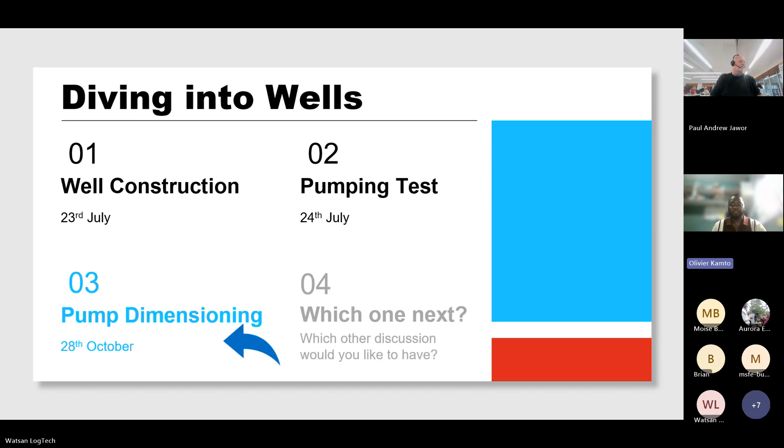Next screen Maite, I think you're in the second screen with well construction, pump testing, pump dimensioning, correct? Pump dimensioning, yes, session 3. So we are not going to make you experts of pump dimensioning, but the idea would be to push us to understand the basic considerations and basic aspects that need to be taken into consideration when doing pump dimensioning. I am Olivier Kamto, I'm one of the MSTs for OCBA, and it's my pleasure trying to guide you through this webinar.

Table of contents, Maite, go ahead. So the idea here would be to talk about why we do pump sizing and what is pump sizing. Is it just an arbitrary thing we pick anyhow, or what are the key concepts we need to accurately size a pump? How do we actually do pump sizing? And we are going to show you some manufacturer tools that will help with the exercise of pump sizing, because as we'll see slightly ahead, manual pump sizing can sometimes be trickier than it seems.

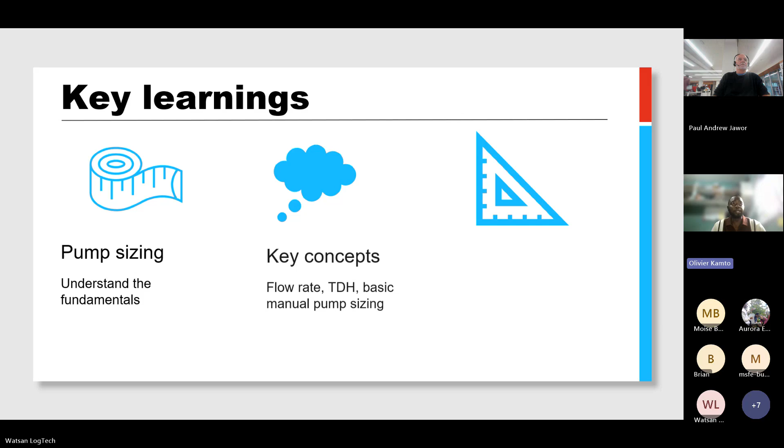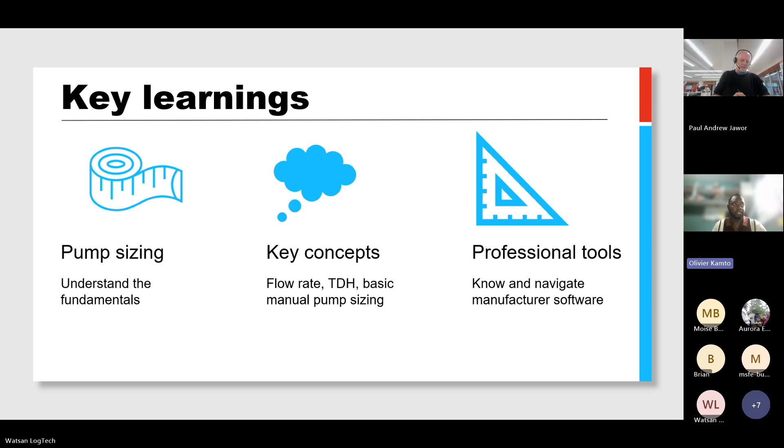So the key learnings we are hoping to bring to you, as I've already mentioned, is to understand the basic principles we need to consider, understand the fundamentals of pump sizing, and then get a feel of the key concepts needed for pump sizing, which are the flow rate, the total dynamic head, and a little bit of how manual pump sizing can be done. But in the end, be able to navigate a couple of manufacturer softwares that exist and which we in OCBA are kind of using now for our activities. Next slide please.

So the first question, what is pump sizing? I'm still not seeing how the screen is, but this was intended to be a question which I'm asking. Can you see the information we have on the screen, Paul? We have what is pump dimensioning, and we have the picture of the pump.

Great. So can anyone tell us what he or she thinks could be pump sizing? You can just pick out, you may want to write in the chat. It could be one word, whatever comes into your mind when we talk of pump sizing. Anyone?

Go ahead, Brian. I think pump sizing is determining the type of pump that will fit in a well or in a borehole, depending on the quantity of water we have, which will also depend on the distance of the tank.

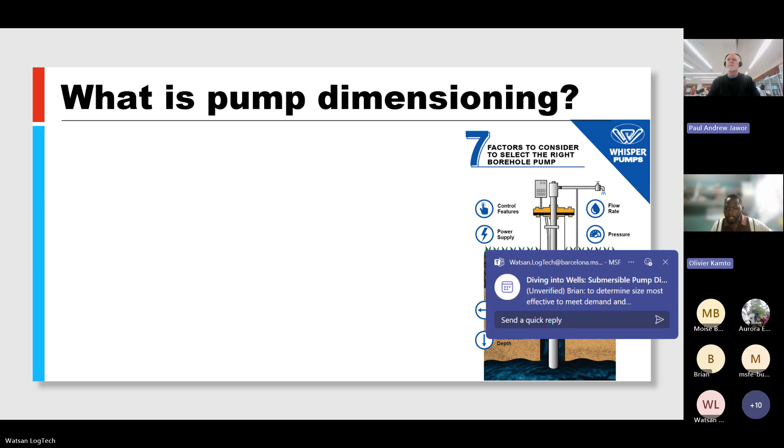Then you've head, got another one. That is great. Power requirement, that is great. The head also, we can link it somehow to the distance to the tank. We would see a little bit how. Brian also commented: to determine size most effective to meet demand and performance of the borehole.

So thank you very much, Brian. I like the idea of effective. I like the word effective, because we are looking for something that should be actually, as the word says, effective, in several aspects - cost can be one, performance can be one, etc.

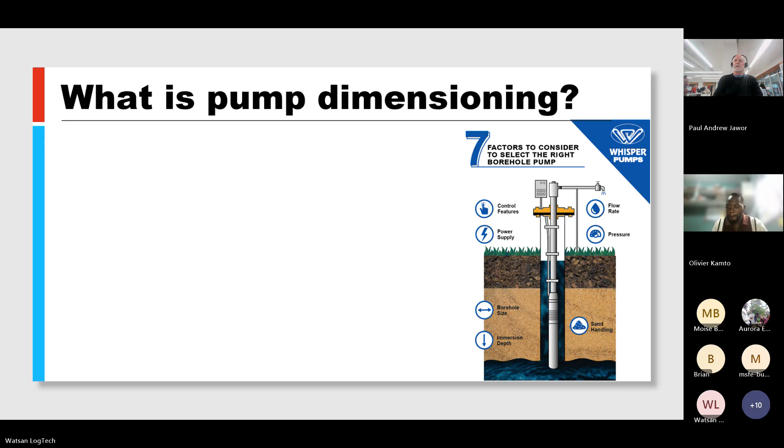So Maite, you may click. Going from all of this information, pump sizing is actually choosing the correct pump that will match the system requirements. The system requirements we are talking about here are the flow and the head of the system, but it should also be able to match the aquifer properties, because we may have system requirements that we need, but it may not match with the aquifer properties.

So it could be okay for our system, but because we are extracting too much, perhaps the aquifer can have a problem, and then in the long run we don't have the water that we need to satisfy our system needs. What is the reason for pump sizing? Why do we do this? Mainly because of efficiency, or to ensure efficiency, to ensure cost recovery, and to ensure reliability.

We should not go and buy a very huge pump that will not serve our purpose, meanwhile we needed just a smaller pump that could have been a little bit more cost effective. Or we should buy pumps that are most efficient based on our system needs.

So there is a risk with pump sizing, and the risk that we often encounter is that we can either undersize our pumps or we can oversize our pumps. Oversizing our pumps will entail high cost to purchase high flow pumps for smaller system demands, which is, we would agree, not very good.

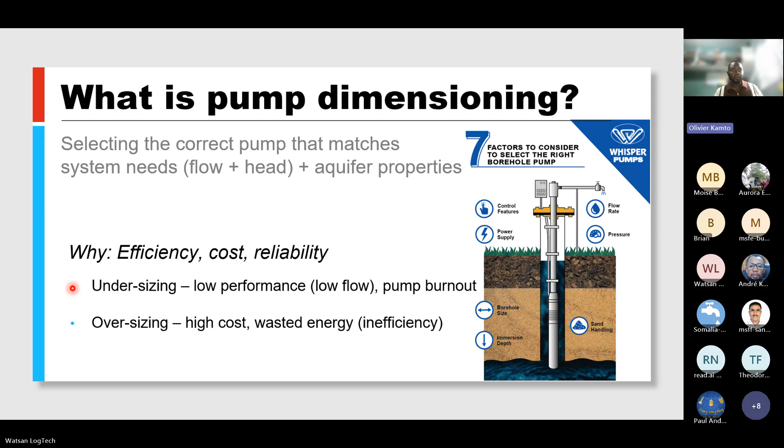In this next slide we are seeing an image. The idea here is just to list some key parameters which we need to consider when sizing a pump, when we have to do pump sizing. So just listing these parameters.

You should not be seeing them, but can you tell me what you think one or two of them are? You see the image is labeled 1 to 9. Can we guess what could be 1, 2, 3, 4, etc.?

Number 3 is already given as the dynamic water level, that's kind of a hint. 1 is the actual depth of the well - thank you, that's correct. Number 2 is the water table, the water level - correct. Someone suggests number 3 is the pump level, the pipe picking water from the pump, but not really - number 3 is what we call the dynamic water level, or the pumping water level.

Number 4 is the horizontal distance between the pump and the water tank. Wonderful, thank you - that's correct. And number 5?

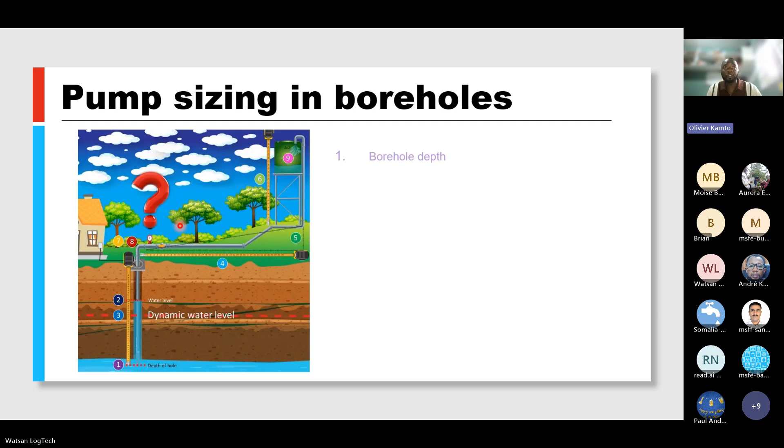5 will be the vertical height, the vertical distance between the pump and the foot of the tower. 6 will be the vertical distance from the foot of the tower to the tank inlet. 7 is the type of pipe, 8 is the size of the pipe - so 7 and 8 are almost similar, it's the pipe and the size of the pipe. 9 is the tank volume.

Of all these 9 parameters, we would have to consider 3 of them when we need to size the pump: 3, 5, and 6. When we add these up, you would see they are geometric heights - we add them up and call this the static head. This is something very vital. Moise spoke of head when we were defining pump, but the static head is just a component of the head. What we need when we want to size the pump is the total dynamic head, which is a combination of the static head plus the friction losses that occur in the pipe.

That is where the size of the pipe, the type of the pipe, and the horizontal distance between the pump and the tank inlet come into play. So 4, 7, and 8 will help us determine the friction losses - 4 being the horizontal distance, 7 being the type of pipe to determine the roughness coefficient used to assess this, and 8 the size of the pipe for velocity and things like that. We saw this in July when we were talking about pump testing.

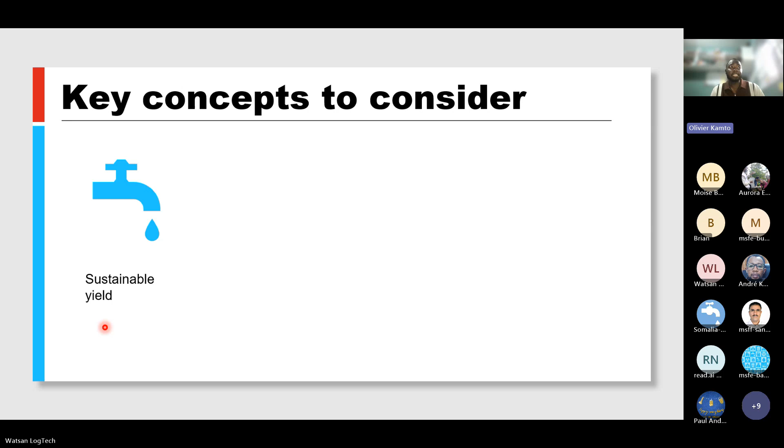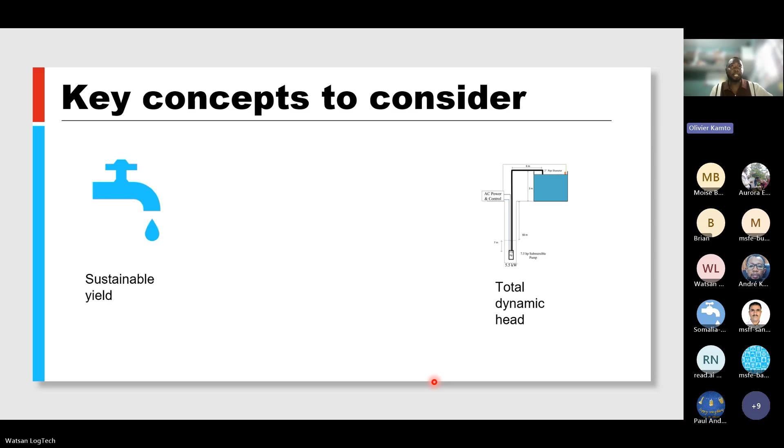The next aspect is the total dynamic head - they are similar things anyway. As we saw one slide back, it is the sum of the static water level, the geometric distance or height from the pumping water level up to the tank inlet, plus the friction losses, and some people would want to add residual losses, but this is not very common.

Another thing to consider is the pump performance curve. All pumps in the market - when a manufacturer produces a pump, they must produce the performance curve for it. For each pump there are several curves for different parameters, mostly the rated flow for which the pump was designed.

The rated flow, the total head that this pump should be able to carry, or the rated head, and sometimes also the power of the pump - that's what we need to consider for pump dimensioning, especially manual pump dimensioning. Another aspect to consider is the power source. I think all of these aspects were mentioned a while ago when we were defining pump dimensioning.

Another aspect that we need to consider will be the power source. Are we going to run on grid power? Are we going to run on generator? Are we going to run on solar, etc., etc., etc.?

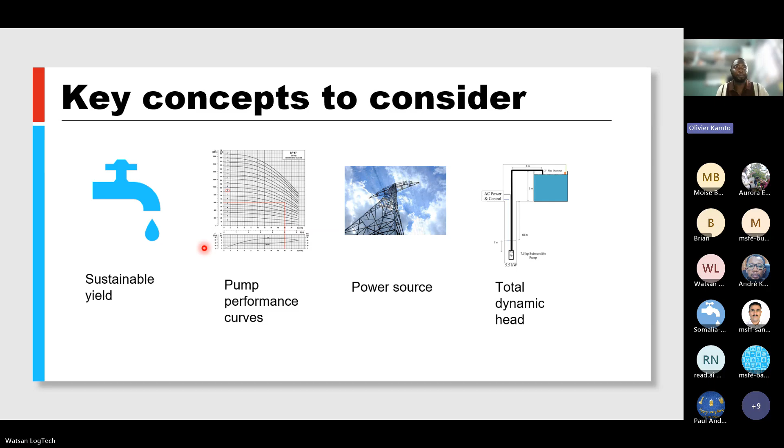In this slide, we would have to talk about the total dynamic head, which we have already seen. The total dynamic head is going to be the sum of the static head, which you see - I tried to annotate it in red, I don't know if you guys can see - it is the vertical distance from the pumping water level or the dynamic water level up to the inlet of the tank.

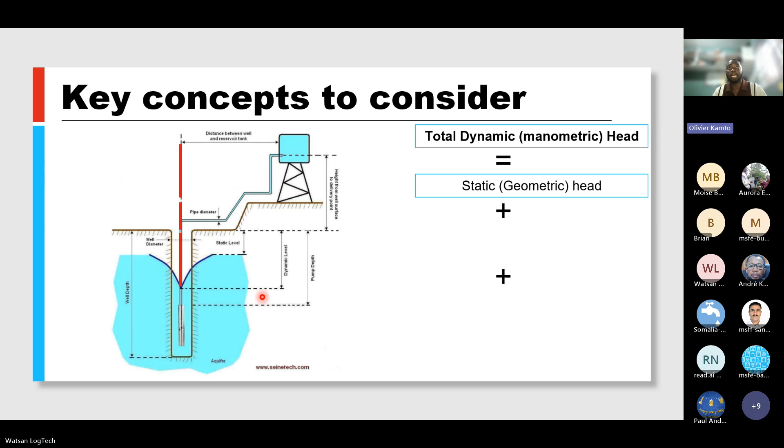We have the friction losses from the pipes and the fittings. Very important to note the fittings also cause friction losses, and sometimes the friction losses from fittings could even be very, very high, so should not be neglected. And as I was mentioning a while ago, what we call residual pressure - it's not very important, this factor, but some people would want to ensure that they have sufficient pressure entering into their tank, and they can decide to add a residual pressure. Generally, it's about 1 bar or an equivalent of roughly 10 meters of head.

So I would pay attention here to the friction losses, which you don't see on the image, but is associated to the orange line that we find here. In friction losses, we talk of two kinds: the linear friction loss, which is the friction loss that occurs inside the pipe, and it's characterized by the pipe diameter and the roughness coefficient of the pipe, so the pipe material.

This is generally calculated using several formulas in hydraulics. We are not going to go into the details of this, like the Darcy-Weisbach formula or the Hazen-Williams formula. As I said, it's dependent largely on the pipe roughness, the flow velocity inside the pipe, or the diameter of the pipe. But equally, we have the punctual losses or the singular losses.

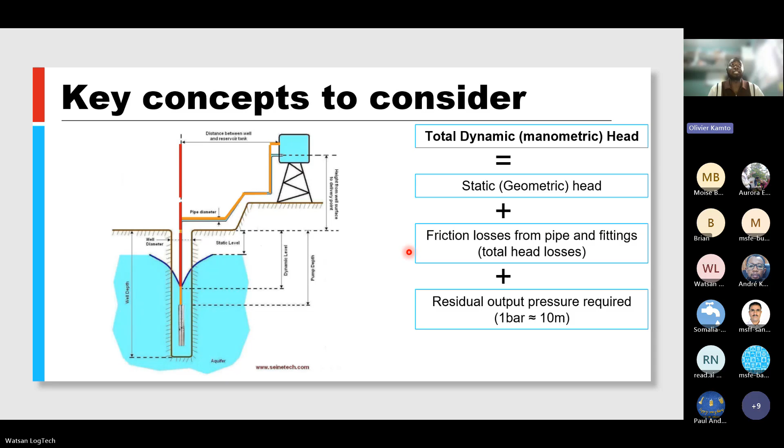This is easy to talk about in terms of calculations, but in practice, what we use more often in the field to determine linear losses is what we call the log scale or the nomograph. There are other tools, but they're challenging to use. I would present here the log scale or nomograph, which is a ready-to-use and relatively easy tool for the field.

What does this nomograph or log scale entail? It has 4 entities, as you can see on the screen. The first one is the internal diameter of the pipe.

The first line on the left is the internal diameter of the pipe. The second is the flow - the rated flow we intend to pass through the pipe, which we would have calculated. The third is the velocity inside the pipe. And the last one is the losses - the linear losses per 100 meter length of pipe.

Any figure you read on this value is the linear loss in meters per 100 meters. So when you get this, you would have to convert it with respect to your total length of pipe.

So how do we read this log scale? We need at least 2 parameters to be able to read the rest. Two of the easiest parameters we usually have are the internal diameter of the pipe - or if we're still sizing the system, we can go by iterations and choose a particular pipe diameter we intend to work with. But one thing we would always have is the flow - the system need, the flow we want to run through the pipe.

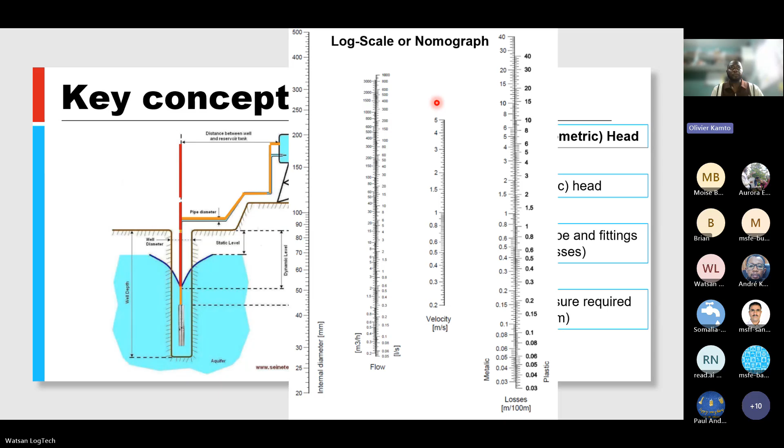In this next slide, we are still talking a little bit about the total dynamic head. This is a very key parameter we have to consider when talking about water, because we have to move water from one point, the pumping water level inside our borehole, to another point, the inlet of the water tank. So the water has to move this distance.

If we have to move it over a 1 meter distance, the power we would need is less than if we have to move it 3 times that distance. It's very similar to carrying a bag of cement. If you have to carry a heavier, 50 kg bag of cement, you need more energy compared to carrying a 1 kg bag. It's practically the same thing that happens with water.

If we have to move the water up to 80 meters of total head, for example, we will need more energy, more pressure to move the water, compared to if we are moving the water just 20 meters. So in water systems, we talk more about pressure, because that is what we use to appropriately size the power we need for the pump and eventually the generator - the hydrostatic pressure.

Next slide. So in this slide, we are talking a little bit about manual pump sizing, and the idea here is to give you the key 4 steps we should consider when doing manual pump sizing.

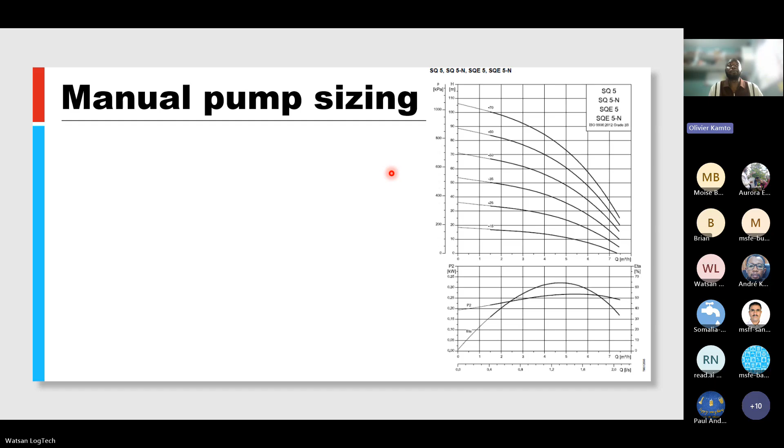Step 1 is to determine the system needs, starting with the safe yield. As I mentioned a while ago, we spoke about this in August when doing the pump test and determining the safe yield of our borehole. So pump sizing starts right from this aspect - pump testing, which is a very vital point we always recommend to our friends in the field when putting in place new boreholes or when sizing pumps, to be able to choose correctly.

The second vital step is to calculate the total dynamic head, which we have seen already - it is the sum of the static head and friction losses. Some people will add a pressure loss or residual pressure or miscellaneous pressure just for security margins, so you should not pay too much attention to that. If your friction loss and static head are properly calculated, you should have a system that will give you the water you need.

Then after this, you would need to check the pump curves, and that is where the bulk of the work happens. It looks very straightforward, but most of the time it may be challenging.

I'll ask this question vaguely: of all of us attending now, how many have experience reading pump curves, or feel confident exploiting pump curves? Just put your hand up to say you're confident. Moise has got his hand up. Anybody else? There's 2 people - is Brian okay? And Brian.

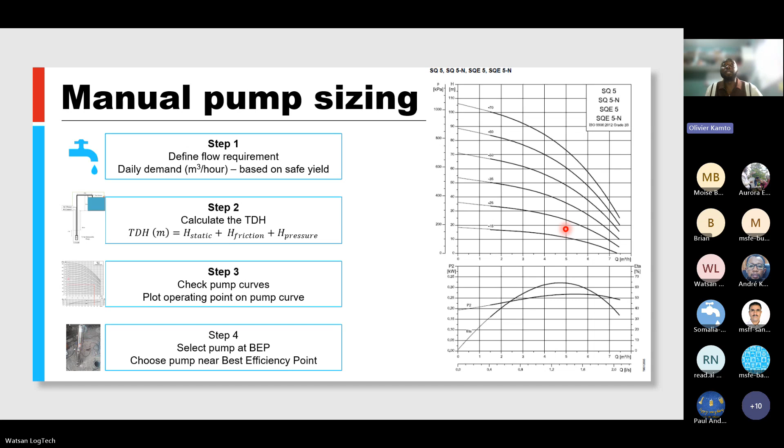If you take pumps that fall largely out of the best efficiency point, then you would have challenges. And there is this other small curve that I have put to give you an example of the problems that you may encounter if you're operating outside of the best efficiency point of your curve.

You would see it goes from problems like temperatures rising inside of the pump, in the engine of the pump, rising temperatures. It goes to problems like low flow cavitation. Cavitation is a very serious problem that happens in pumps.

What is cavitation? It's generally just the creation of air bubbles inside of the motor of the pump, and these air bubbles will cause the wearing down of the bearings of the pump, the wearing down of the impellers of the pump, and then eventually your pump gets broken and you start wondering why.

You have problems with the seal life, etc. This is when you're far below the best efficiency point. But if you're above the best efficiency point, you still have problems on the bearings, on the seal life, and equally cavitation problems. So it's always very important to ensure that you identify your pump is working at the best efficiency point.

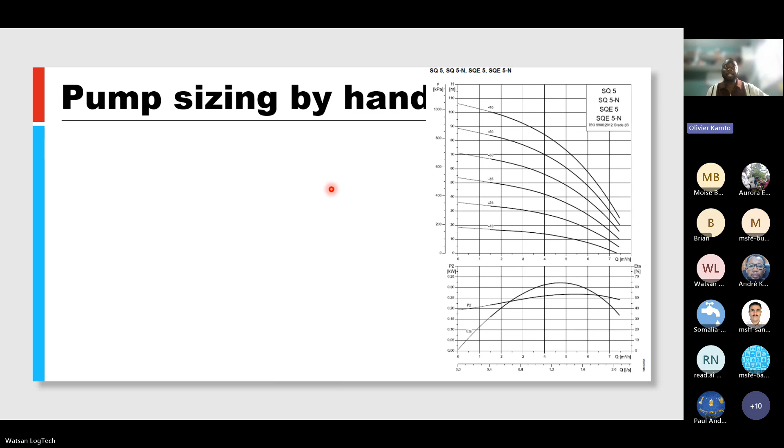Manual pump sizing normally should look easy, but there are a lot of things that can cause you to pick the wrong pump. Some of it could be approximation of friction losses. If your friction losses are poorly calculated, it will lead to a poor total dynamic head, which could be very low or very high. A low total dynamic head means you get a pump that probably will not cover your system, while a very high total dynamic head means you're getting a pump that is not cost effective. You could have gotten something cheaper that would have worked for your system.

Sometimes the data curves for the manufacturer's pumps don't exist. We find this with ready-made pumps locally, where most suppliers are more or less business people. Their interest is to sell the pump and make their profit, but what happens after that, or how the pump operates, is not generally their concern. From my experience, manufacturer curves often don't exist, and even trying to find them on the internet is very difficult. Only some of the big manufacturers have their performance curves online.

Sometimes human error also comes into play. If you consider liters per second rather than meters cubed per hour when reading the log scale, or if you do a poor conversion of units, it could lead you to wrong data. Reading the efficiency curve poorly is also a bit challenging. The idea for manual pump sizing is that we should look for a pump that will work, but not necessarily at the best efficiency, because getting something exactly at the best efficiency is most of the time challenging. So these are some of the risks of manual pump sizing.

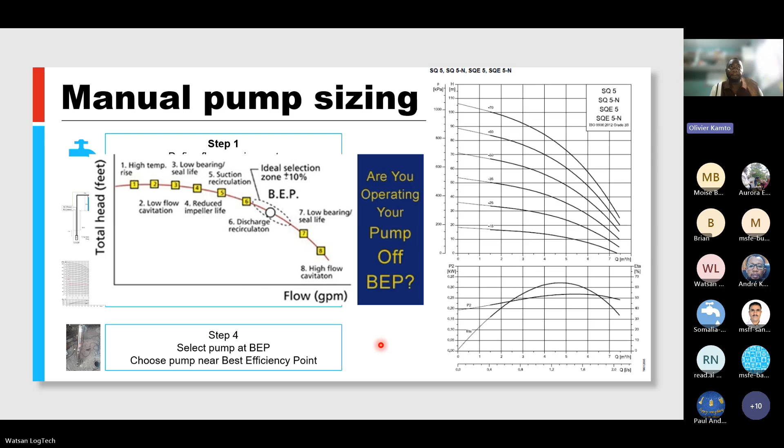In this slide, we have spoken about the flow needed and the total dynamic head. Remember we spoke about the pressure or power we would need to move water from the pumping water level to the tank inlet. We've also spoken about the efficiency, which is the efficiency of the pump curve at best efficiency. These are key parameters that have to be considered.

When working on the pump, we need to consider what we call the pump motor power, calculated as the pump hydraulic power divided by the efficiency of the pump. The hydraulic power of the pump is calculated as the flow of the pump multiplied by the density, the acceleration due to gravity, and the height—here we are talking about the total dynamic head. So the hydraulic power of the pump is directly proportional to the total dynamic head.

So if we have a very high total dynamic head, then we would also need more pressure, more power, to be able to move the water from the pumping water level up to the tank inlet.

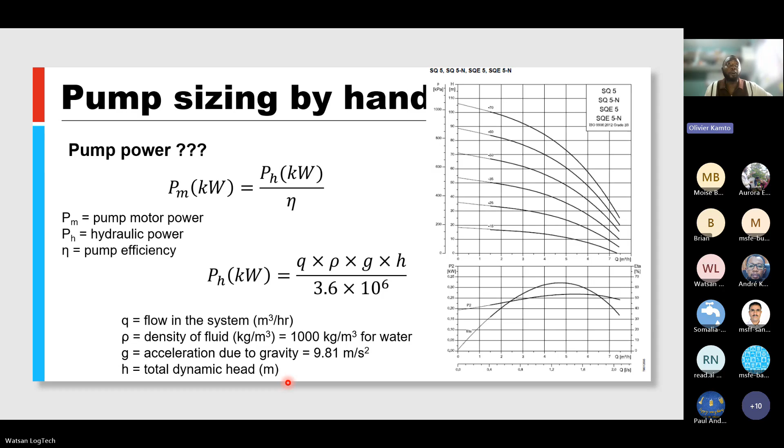For example, if one impeller pushes water 10 meters above ground, that's how it's designed, then a pump with, say, 6 impellers would be able to have a nominal head of about 60 meters, something like that. So the more impellers or stages you see inside your pump, the higher the head of the pump, and the higher the head, the higher the power or pressure of the pump.

Voila. Any questions so far? Or shall we continue?

Anybody have any questions for Olivier on what he's doing so far about the pump sizing and the impellers? We're about halfway through now, so everything's going well, I think.

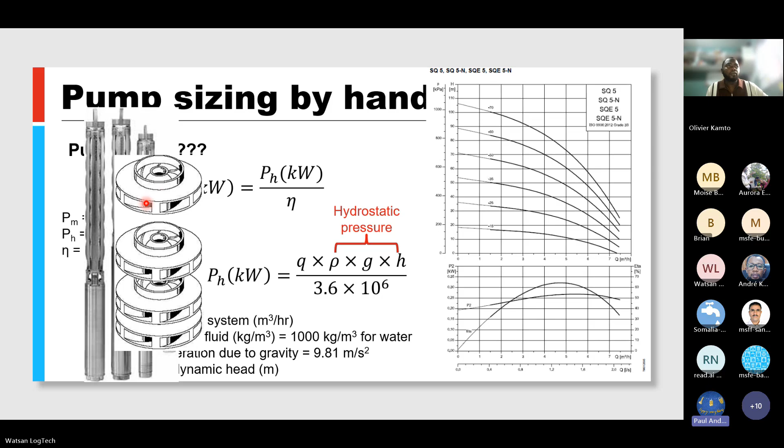Go ahead, Olivier. Next slide, Maite. Here in the next slide, we would dive a little bit from manual pump sizing and then come to software sizing. Just some key points to note about software sizing: it helps to automate friction loss calculations and also curve matching.

So we would not have to be looking into... please excuse me, let me send this child away. One second, please.

Give us some opportunity to write a question or two in the chat for Olivier to answer when he comes back. Well, let's wait till he comes back.

So I was saying for software sizing, it should be much faster than manual sizing. If we have the correct input, we should be able to automatically calculate our friction losses, and the software will generally help us perform the curve matching and give us more or less the pumps that fit closest to the best efficiency of the pumps they are going to choose. Manufacturers like Grundfos have thousands of different pump curves. Imagine having to go through 20 or 30 of them, or 10 of them, to choose 1 or 2 pumps. It can be challenging. For one pump we may find time to scroll through their catalog, which is sometimes huge, but for 5, 6, or 10 different pumps, you'd agree this could be challenging.

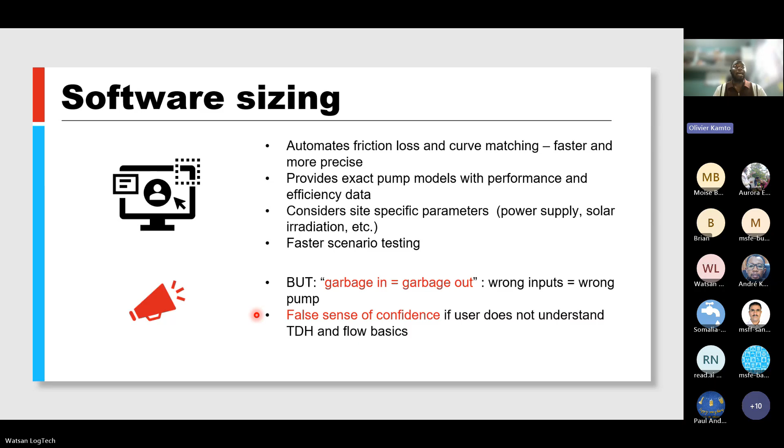Then I will go into specifics for solar. Solar is a resource that we have free of charge and which can be exploited, and a lot of things in the world are gradually going towards solar.

So the water industry as well is going towards harnessing solar energy to power pumps, which is increasingly becoming a topic of the day. Now, solar sizing depends on a couple of parameters. The location where we are on the Earth will associate with what we call the irradiation. If you're in a very cloudy place, the irradiation may be very low compared to a sunny place. So in Switzerland, for example, the amount of sunlight power you can generate from the sun may be very low compared to if you are in Chad or Sudan. So the location on the Earth is very important.

The time of the year and the day is very important. When there is cloud cover, you will not be able to have solar power. At night, you will not be able to have solar power. So these aspects are associated into what we call peak sun hours. I don't expect us to calculate peak sun hours ourselves—there are a lot of databases that give you peak sun hours for different locations in the world.

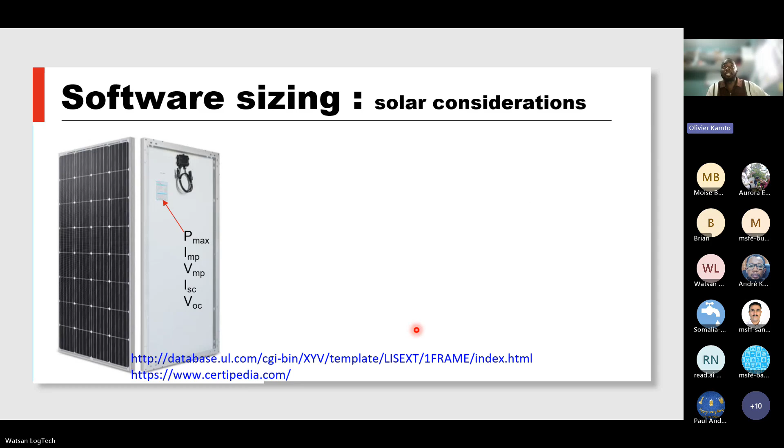In this next slide, I am talking about the amount of water which we pump. A couple of slides back, when discussing manual pump sizing, we talked about the amount of water we pump per hour, because that was based on our safe yield—the amount of water which we pump per hour, which is what we need to extract from the borehole.

Olivier, one second. Yes, the image is the solar. Just click—sorry, just click, the next image will come. I'll come to the solar panel, sorry.

So I was saying we have to look into the peaks we need to consider when talking about water for solar. We are talking about the amount of water we need in one day when sizing using solar, not the amount of water we need per hour. The reason being, we are working with the sun, and you would agree the intensity of the sun we feel even on our heads is not the same throughout the day.

In the morning periods it's lesser, and when we go towards midday, 1 p.m., it becomes harsher, and later on it starts dropping again. So harnessing solar power, it's kind of a curve. It fluctuates, it increases with time, and then it drops back again later on.

So it becomes challenging if we have to go by meter cube per hour, because we do not have a constant pumping rate compared to when we are working with the generator or the grid. The more irradiance we have, the more the power increases. So the power the solar system generates in the morning is less than what it generates later on.

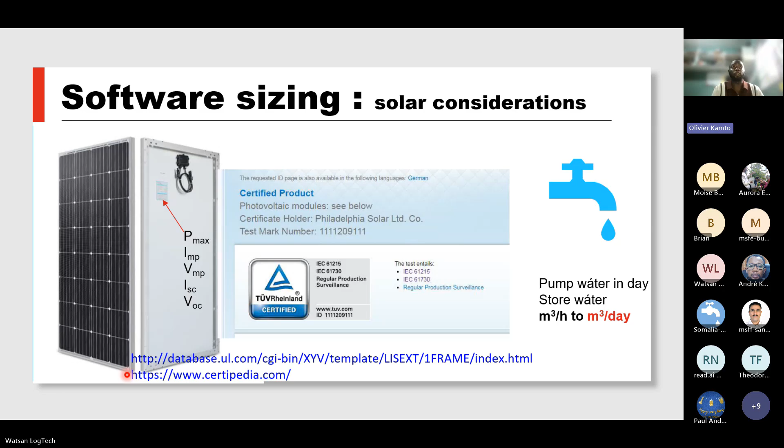In OCBA, for pumps, we have 2 brands which we are recommending for submersible pumps, for example, because these can be found almost everywhere. But for solar panels it's a little bit tricky. If we have to recommend a particular brand, it could be very challenging, and each time you have to acquire a solar panel you may need to start looking for what they call international orders, and this could be time consuming, time wastage, etc.

So this is kind of an easy way to check and verify that the solar panels you may have locally around you could be good solar panels and could be certified. Next slide, please.

So in this next slide, as I was saying, we have 2 brands of pumps which we recommend for OCBA: Grundfos and Lorentz. One particularity is that Grundfos is a Danish firm, and they produce their pumps in Denmark. We recently signed a partnership with Grundfos, giving us some privileges on some of their pumps.

So they have a sizing tool which is accessible online. For you to use it, you would have to go to the Grundfos website and input your parameters. We are going to try to navigate that a little bit. With Grundfos, you can size both solar pumps and conventional, normal grid-powered pumps.

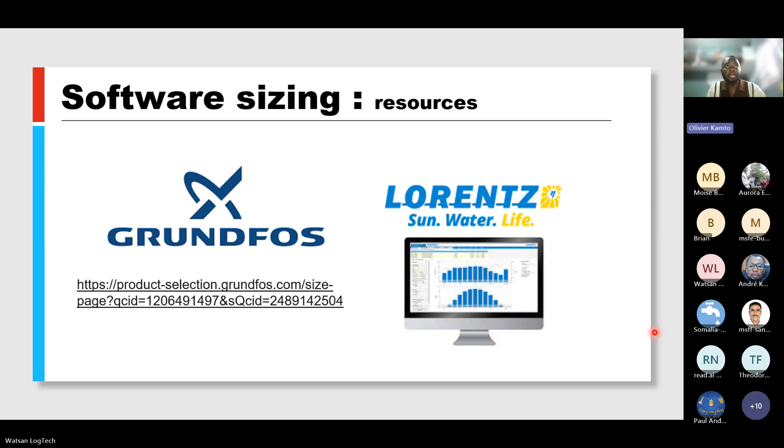So in the example, I think you have all of the parameters stated there, and I am saying we should ignore the residual pressure and consider 10% of linear losses as punctual losses. For that, I'll ask you to rapidly calculate the static head, the friction losses, the total dynamic head, and to identify from the pump curves which pump curve you would have to choose. Maite, you may want to put in the chat the documents I shared with you for the log scale and the pump performance curves, so they could be used.

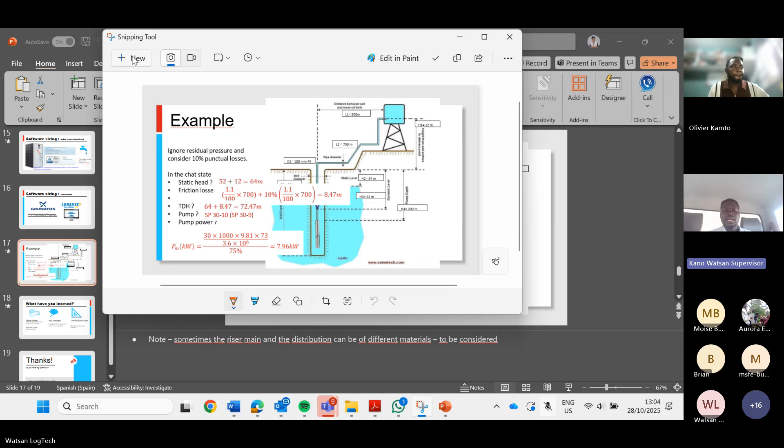Is that okay? She's doing it at the moment, I think. Oh, let me see, maybe I can try it myself. Okay, let me see, I can put it. You can put it this way. I have to change user. Okay, let me put it then. Okay, something is not right here. Wow, something is happening here now. I'm not sure why this is happening.

At the moment, while you're watching the screen which Maite has up there, you can look at the static head, because you can see what has to be added together to give you the static head. You can also look at the example of friction losses for the pipe lengths and things. The other ones you have to wait until we can get the tables put in place so you can look at the calculations. It's really strange, yeah.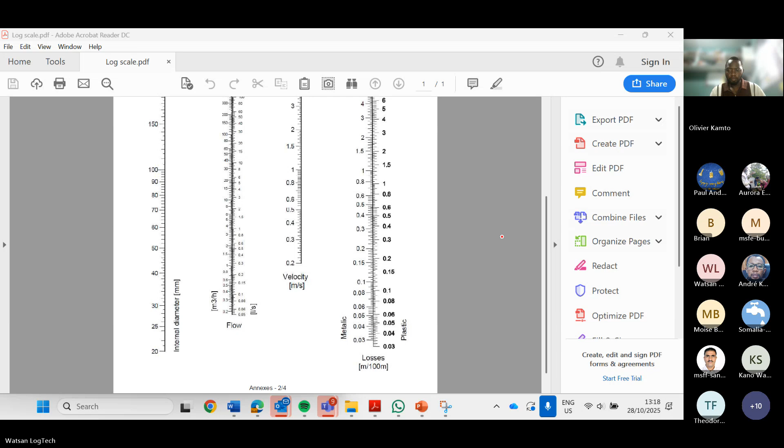Can we now compute what we have as friction loss? I'll keep quiet for a while, and I want you to give me what you have as friction loss. So you should be calculating now, anybody, the friction loss.

What are we considering? What do we need? We need to find the friction loss for 700 meters of pipe. So we have to convert 1.1 per 100 to the friction loss for 700. That is correct, no?

Okay, have an answer there from Theodore. 1.1 per 100 times 700 plus 10% of 1.1.

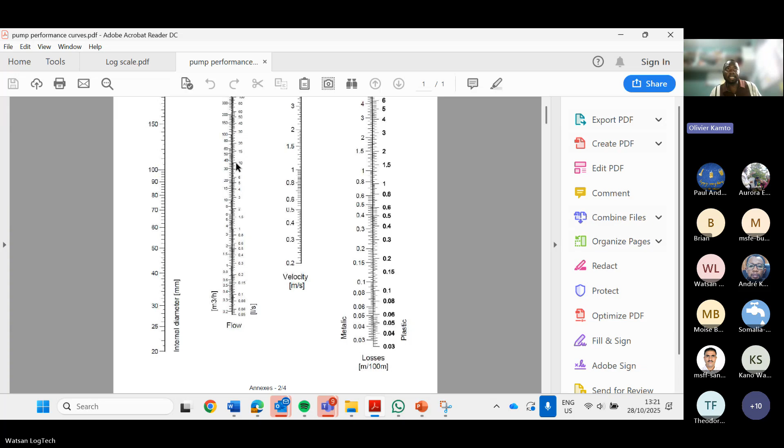Now we had to choose the pump, right? And the idea is to choose a pump which I had shared, but unfortunately it's difficult to send to you. I don't know why. So perhaps, Maite, you may want to put up the pump curve again, and then we would see if someone can identify rapidly what pump may be suitable.

So you're dealing with your 8.4 losses. We have the 8.4 losses. We have 30 cubic meters per hour. Now the idea is which of these pumps that you have should we choose?

Have a look for the smaller head one, Maite? Just for a hint, I wanted to share this - I think I sent 3 pumps. The idea was for people to be able to go through, but now it's challenging.

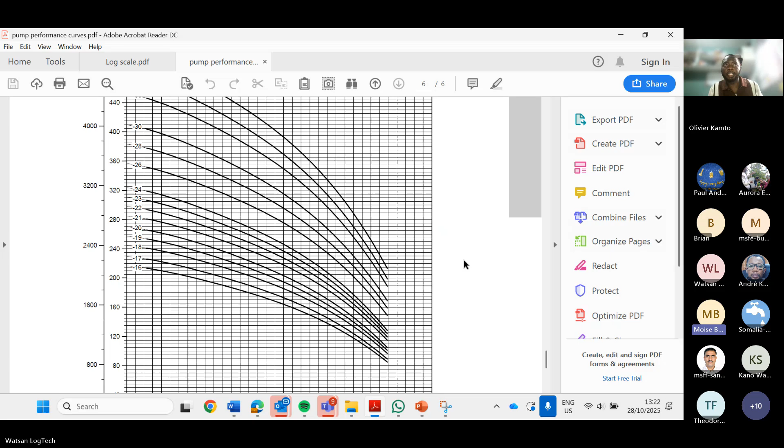So you may just want to use my page. It's very fast for me, for the SP, it's very fast.

Now I was just trying to get the ones that we have more or less the flow rate of 30. You said 30, isn't it right? Or am I right, 30 meter cubes? Which was the flow rate you said? 30, yes, use the SP30.

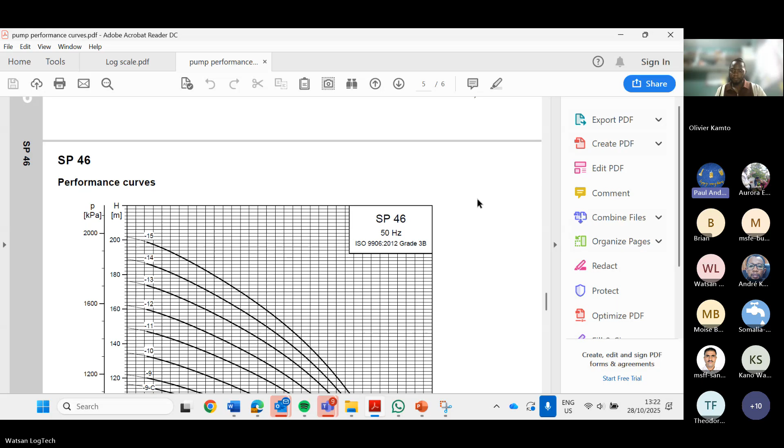SP30, Maite? SP30, which - go up, that's it, that's it. So we are in 30 meter cube.

Wait, 30 would be - and the one that has the efficiency curve, the one that has here, below. And then the head, we're like around 80. Am I right?

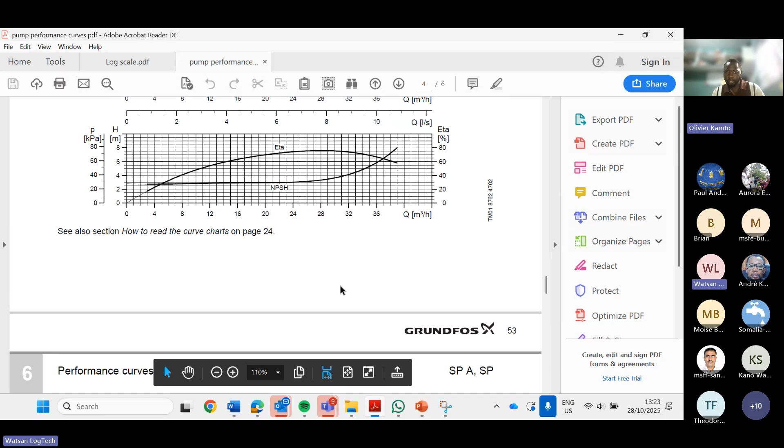Olivier, I believe - yeah, so we are supposed to look, you're on page 3 now. On SP30, 50 page hertz, 50, I'm in page 6. Is that page 6? SP30. No, 6 is the chapters.

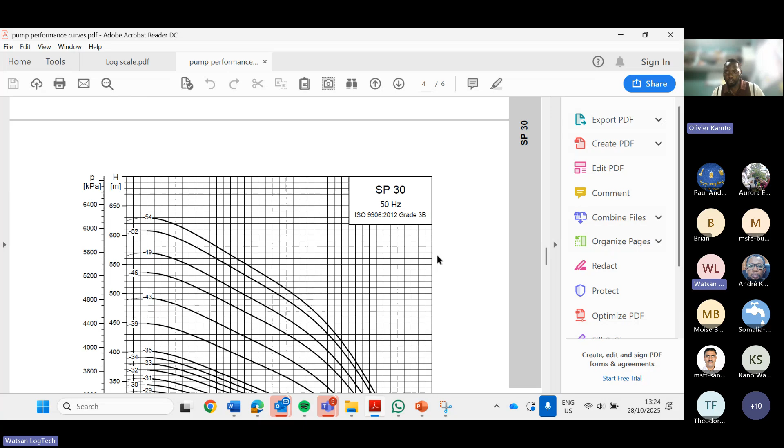Look below, the page number is below, close to Grundfos. Yeah, so 52, great.

On 52, what we have to do now is the pump efficiency curve. What is the maximum efficiency of this pump? We see it oscillates, it is about what they call - it's about 75%. No.

The peak of this curve, if we look at it on the efficiency curve, which is slightly below - yes, around, yeah, 75. Let me just put on this, at this efficiency.

We have at the flow of 25 up till about 30, we are still within this efficiency rate. So our system need, which is 30, falls very well within the best efficiency point. Do we agree?

Yes. Great. So if we now mark on the curve above 30 cubic meters per hour, we draw a straight line up and we find the intersection. How much was our total dynamic head?

It was 72 or 73, more or less, right? So if we go from 72 and 30 cubic meters, we fall somewhere. Can somebody tell me approximately where we find ourselves?

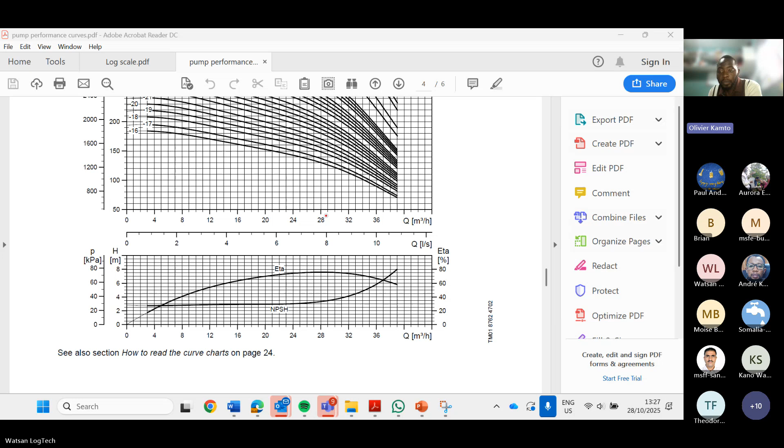So the level between the pumping water level or the dynamic water level and the ground surface you see is 52 meters. Is that okay for you? Do you see that?

Sorry, it's complicated to keep sharing the one with data. If I share just the slide now but keep changing from place to place... You have it in the chat already, so he can look, and I can talk with him from the chat, so that should be fine. Okay, so you can just continue with the pump curve.

So Sahel, you see, we have from the pumping water level up to the groundwater level, that is the pumping water level or dynamic water level. Then H1 is written as the height from the well surface to the delivery point, that's the figure I gave you. The point I'm noting is you should always ensure you take the total geometric distance from the pumping water level up till the inlet point. These are parameters that in the field, when doing your estimations, you'd have to measure to avoid surprises.

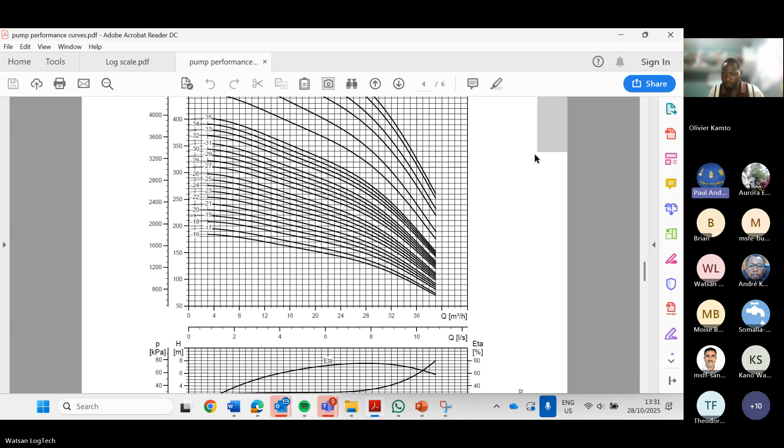It seems that it doesn't cross the maximum efficiency curve. Wonderful, so where do you find yourself? Just above 50, this second line between 105 and 50. So he's saying the line doesn't cross, does it? You find yourself somewhere, right? Yes, but sorry, I cannot see it clearly. So doesn't it cross? You find yourself between two curves, right? Not really, it's below all the curves, around 70-80, below all the graphs.

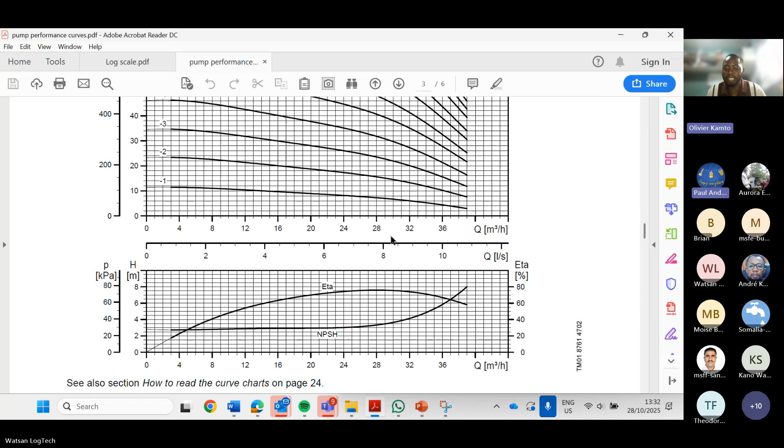Okay, Maite, then it means you're on the other curve, it starts with 150. There is another curve just above, that was the exercise I wanted us to see if we're looking at it. There is the other curve above, which is the curve we should use then, it will be that one. Yes, there you go, we are at 30, now you go up. So you see this is the complexity with manual sizing, because you may have something and it is not going to be what we need, right?

So you have to look for the first curve, then the next one, then the third one, etc. That was why I sent the 6, so I was hopefully going to get us thinking.

I think now you have the correct one, right? Yep, that's better. And it was spotted by Brian as well. Well done, Brian. So you can go up directly now, with efficiency as well.

I think that should be good. And now you'll be able to give us the number because it's nearer between the two graphs. It appears to be between the two lines. So now it's between two lines, right?

Which of the two lines does it fall between? You just have to go up a little bit. You follow the line, and at the top of the lines we have a figure. You would see the figures go from 1 to 15 on this curve. So the two curves where you fall between, which are the curves?

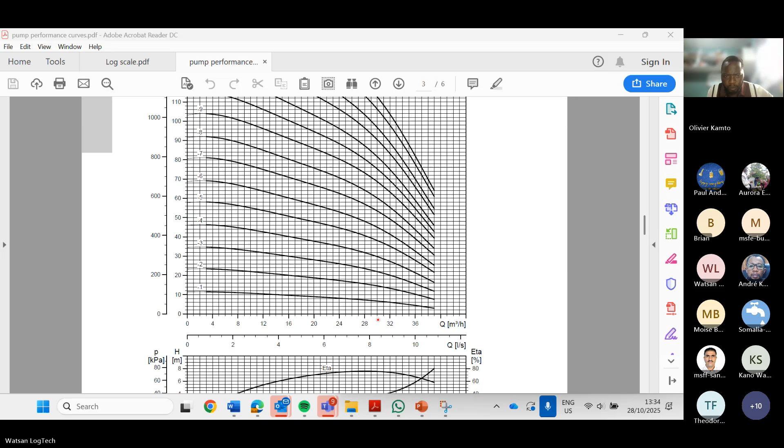I would go for 6. So that's the line, approximately the line might have drawn for the 30. So it's on that line. Somebody, that one is not me. Okay, oh, okay, sorry.

I understand somebody said 6, somebody said 8 and 7. That is fine, but I would suggest to check a little bit further, and we are not drawing a horizontal line here this time around. We are looking at the curves that have already been plotted.

When I was looking at this, I think we are between, on the contrary, we are between 9 and 10. You correct me if I'm wrong, but I think we are between the curves.

Just remind everybody what the numbers are again. The Q, as in meters cubed an hour, is 30. And the other number we're looking for? 73. So if you go across from 73 and the 30, you will get to between 9 and 10.

I don't know if you guys see it. That's between 9 and 10, is it, Maite? I think it is, yes, between 9 and 10. Yes, it's around here, a bit more on top of 10, but yes, around here. Maite's put the spot approximately there. Yeah, that's right, that's good enough.

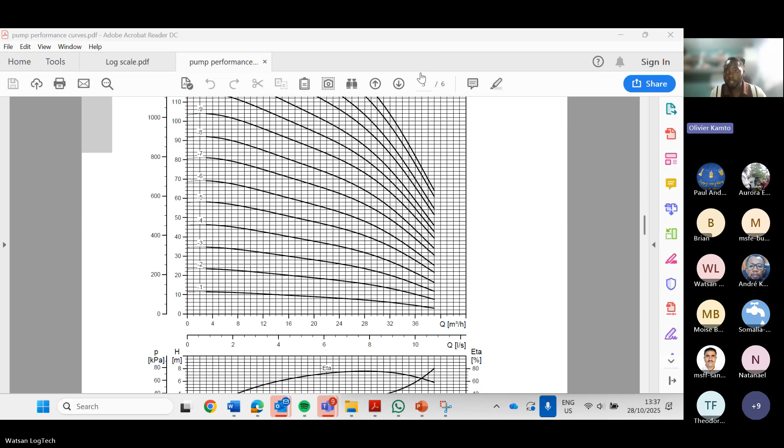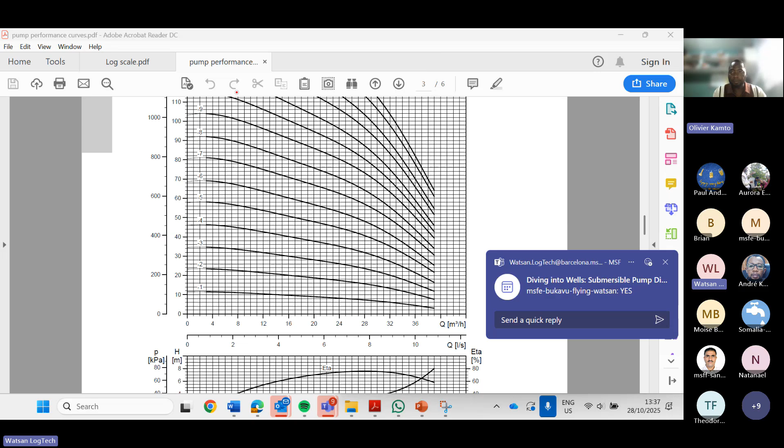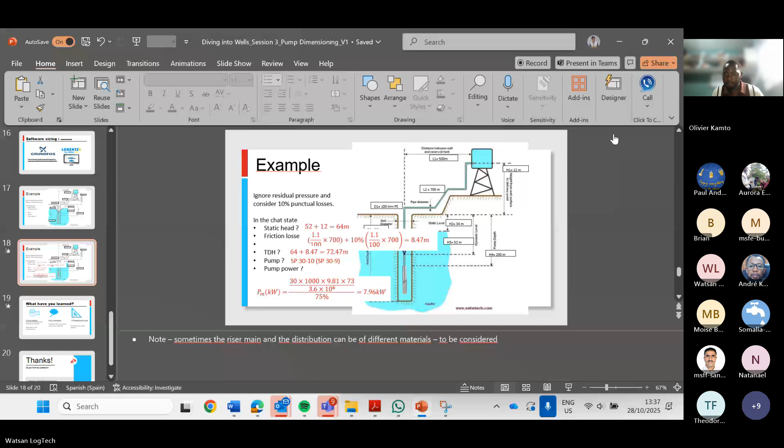Yes, please. Voila, and this is 10. That's fine. Is that okay? Now I'm sharing back the exercise again. Voila, so that's fine. This is generally how we have to go for this.

The next thing which I asked was to be able to calculate the pump power. Maite, you may just pop that out, which shows how we calculate. Brian says yes, not to forget friction loss, otherwise your pump is small. I'm not sure I understand what you mean by this comment, Brian.

If you pick the lower one, I think he says if you pick the lower one, you will have a problem with the friction losses. That's correct, if that is what you're talking about, then that's what you understood. Exactly, so wonderful, thank you.

So you'd see here, I was just trying to calculate what is going to be the motor power which we would need for this pump. And from the calculation, you see we would need a 7.96 motor power. Now you can go for this as homework: if you check on the internet for the SP30 brand of pumps, you would see these pumps have a motor power of about 9 kilowatts.

So this is giving you an idea of the generator power which you would need to be able to run through to power the pump. So that was just the idea for this.

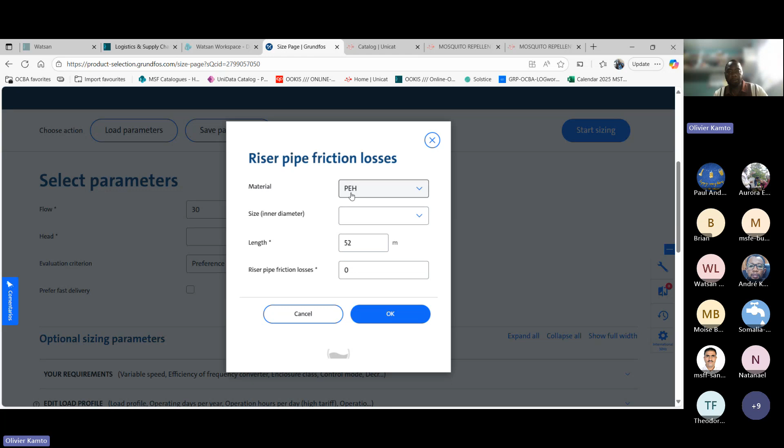So we would come to the riser pipe here, and we click on the calculator again. The material is polyethylene, the inner diameter of the pipe we said is 100. You'll see from their drop-down list they do not have 100, so I can put manual input and put 100. The pipe length for the riser pipe is 52 meters, right? That is what we have on the image. I'm sure you guys still have this in the chat, so you can confirm with me.

It is H4. And then the riser pipe friction losses, we put a fraction of 1 and let it calculate it. Suppose here we have to put between 0 and 1, so it has to calculate the friction loss. And then I click on OK.

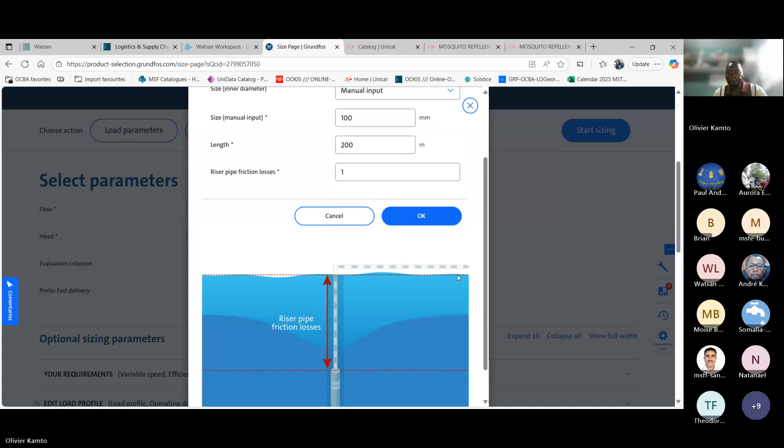Okay, one second, one second. The material is not good. I was supposed to use this material.

Voila. This is the challenge now sometimes that we have with the Grundfos software. It bugs a lot when it comes to calculating these friction losses. So this is sometimes where we have to pay very special attention. In a regular pump calculation, it has this issue for friction loss, but in the solar sizing, the issue generally is with inputting the solar parameters. That's a challenge that, in principle, Grundfos is having with their sizing.

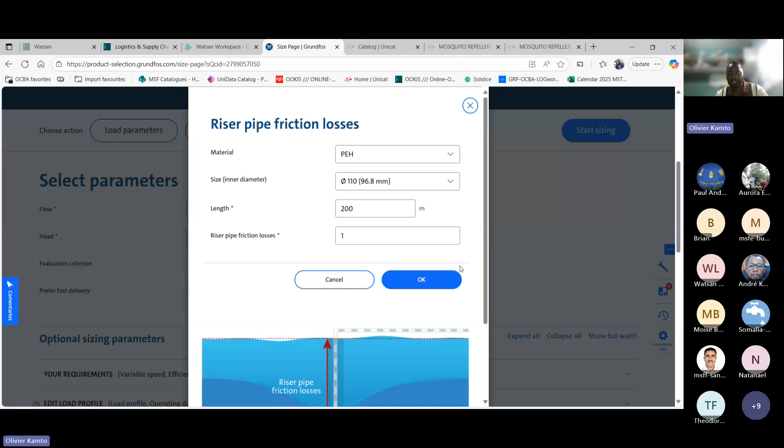Yeah, I'll try something else. I will not go for manual input. I would choose, for example, so that we can see the friction loss, this 96, which is closest to our system, and then I will ask it to calculate. You will see now it should give us the correct figure. Now you see it has calculated the friction loss according to Grundfos of 2.4, right?

Then we will do the same for the discharge pipe, the same pipe material, the same inner diameter pipe. And then the length of the discharge pipe here is 500 meters, which is the horizontal length from the borehole to here. L2 is the total length, that is why it is 700 meters. It is different, so here the length is 500 meters.

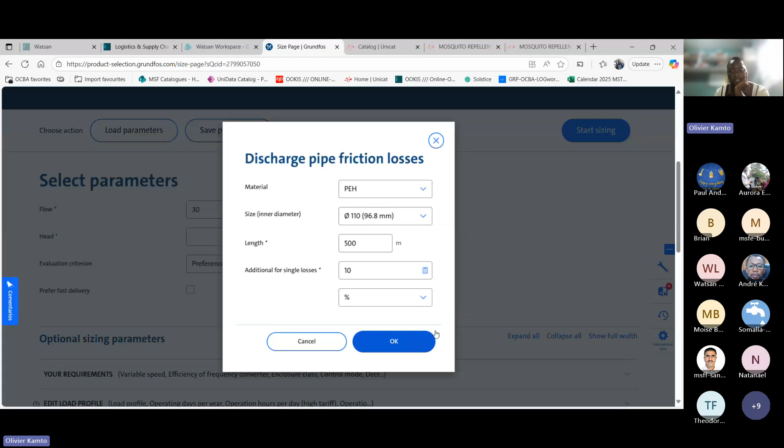And then an additional for single losses, it's 10. We said in our example 10%, and that is it. We would validate here, and we see what it gives us as an answer. 6.7. Okay.

Okay, so you'd see Grundfos calculates the total head at 73.23. We calculated at 72. Remember, we used the nomograph, which is more approximate. They used formulas and calculations, and that is why we have this. So we are almost similar. This is fine, 73, this is still good.

So these are the two key parameters which we need to input. All of these other systems are for when we want to consider particular configurations. This is not of importance to us now. Once we have these two figures, all we need to do is start sizing.

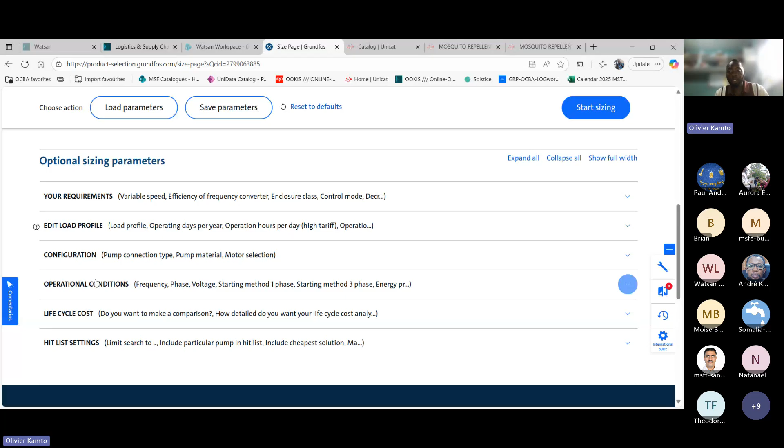And then the software is going to give us everything, the different options concerning this system that will meet this system. It will give us the... oh, whoops, a little bit frozen there. Systems that we are seeing here now. Yeah, I think it's loading, it's turning and turning and turning.

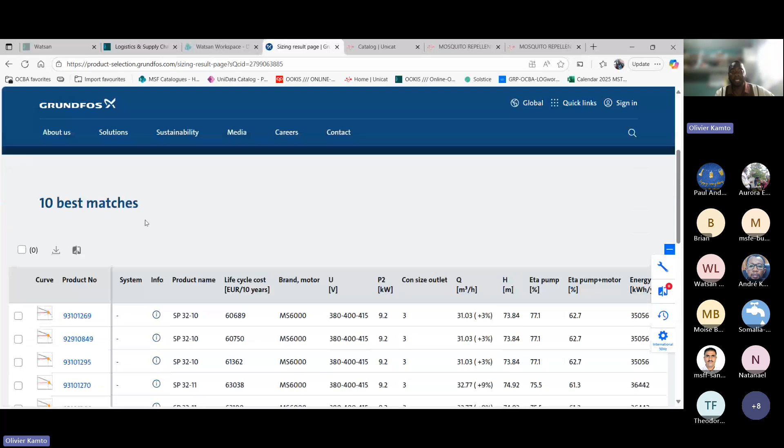And you'd see, voila, 10 best matches. So it says 10 best matches, right? So here we have the different options that Grundfos proposes to us. Here is the SP3210, not the SP30. And it gives different parameters: the power, the flow, the height, the efficiency, etc. So these are the different options of these pumps that you can use.

You'd see it's SP3210, SP3211. Yeah, it's just some life cycle analysis which we do not need, based on where it has been produced and all of these kinds of things, because it will depend on the product number. So now based on this, if we click on this, it will give us all of the information, for example for this particular option with the pump curve, with the performance curves, and the system points, etc.

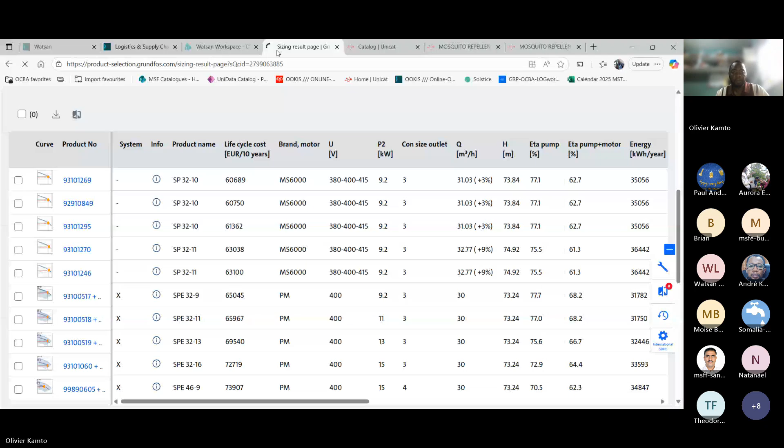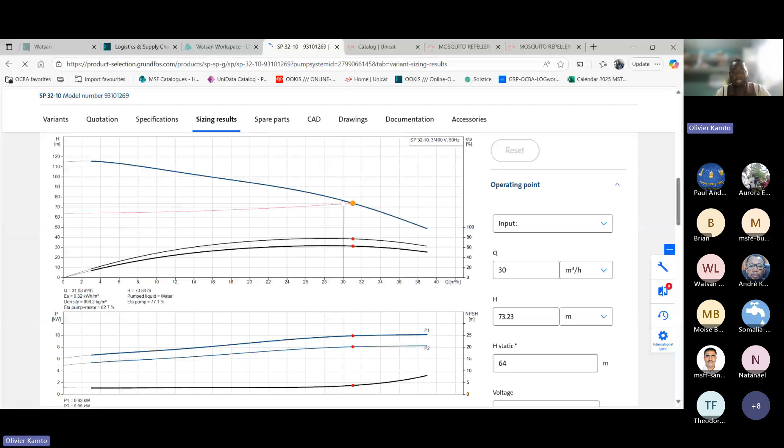And voila, you can see them, all of them here, sizing results. It shows us everything here: this is the load profile, this is where we are, and all of it. It gives us the characteristics of the system which we have mapped out. 73, it goes up here, and 30. This is where it is, and the best efficiency point is slightly above here. So you have everything concerning this pump as you would want, and all the characteristics.

So this is Grundfos, and you can easily pick this. You can, if you want, print and stuff. We will not go into all of those now. As I said, you can print from here.

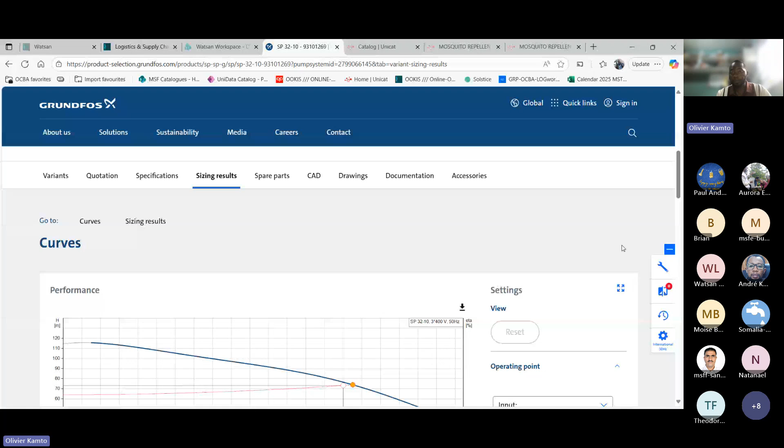If we are done with this, I'll go back one step. It brings us back to the result page. And if we want to modify something in the input we put, we can do edit sizing, and it will modify, and then it gives us again everything we needed there. So this is it for Grundfos. Any question?

No, looks all quiet, go ahead. Remember I said, yeah, so that is it.

Now, if I go back a little bit to edit sizing again, and we come in municipal water supply, and then we take solar water solutions, and then we take solar system. We can take the solar system. Then we would have, you'll see the page has changed.

And what does it start with? It starts with the location. Remember a while ago when we were talking about solar considerations, we spoke about the location because the location is very vital. They always start on the initial page. When you start, it will show you the location of where their factory is, a good marketing policy. But now it is for us to modify and put wherever we are.

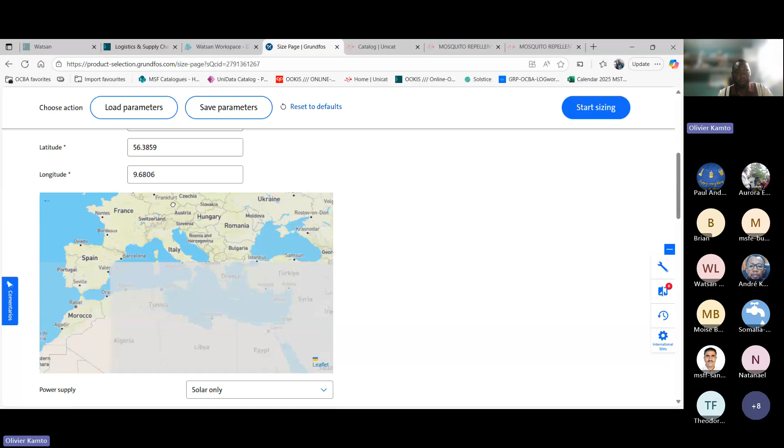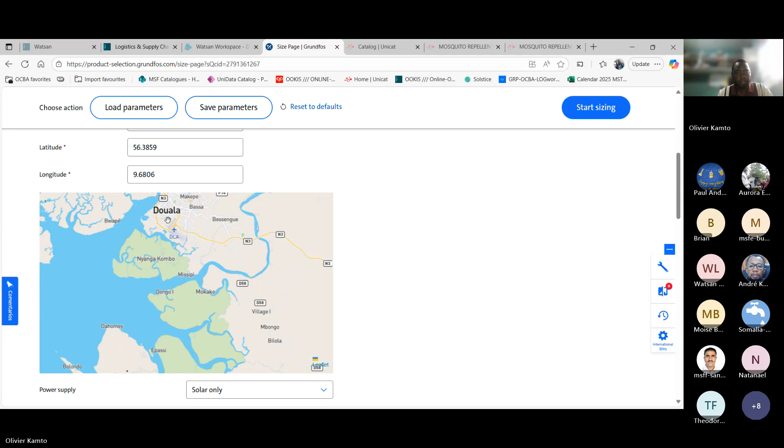If we have the latitude and longitudes, we input them. If we know where we are, we can scroll on the map, for example, and choose wherever we want to go. You see they are right in Denmark. Let us choose, for example, Douala, where I am now. Voila, let's take something around here. And you see Douala, it modifies the latitude and longitude automatically.

And then we have to go, the power supply, let us go for a solar system alone. And then the type of pump is a borehole pump, we size by water volume. And we have to input all of these other parameters again. You remember a while ago, I said we are sizing meters cube per day, right? So you see even here, they have already put, we should put meter cube per day, and etc.

So if you come to each of the parameters, you would see what they have written: required water volume per day in peak season, static lift, the geodetic difference in height between the ground and the consumer or tank. And you can click on this information stuff. It can give you a small image to ensure that you are not mistaken with what you're considering. So you see here is the height between the tank inlet and the height from the ground level where you have your borehole. The static lift above ground.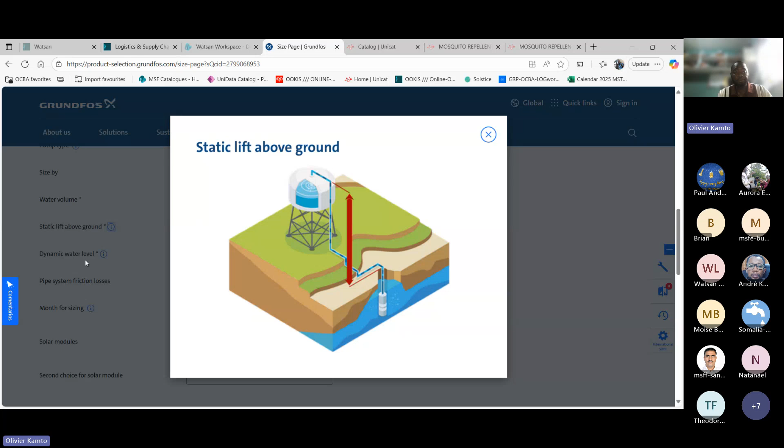And then below it, you have the dynamic water level, which is the water level as we saw a while ago below the borehole. Up here, you see the dynamic water level, which is a sum of the static water level and the drawdown. So it also gives you these illustrations that can help you to ensure that the parameter you are inputting is the correct parameter. So that is a little bit how it appears.

And then the friction losses calculations is practically the same like what we saw a while ago. And the parameters which you have to look, something that I want to ask you to pay attention to now is the month of sizing. Remember we said solar irradiation varies from day to day, it varies from time of the year. So when you're sizing for solar systems, you have to pay attention: what application are you sizing for? Are you sizing for the best month when you have all of the sun, the best sun during the year? Are you sizing when you have the least sun? This is up to you to choose, and then you have to input that here.

You see, so for the area where you are, you should be able to check, and it will tell you what period of the year corresponds to what sizing time. You see in January in Douala, this is information for Douala because that's my location. It gives me from January to December the different irradiation values. By default it chose July, because in July, in August...

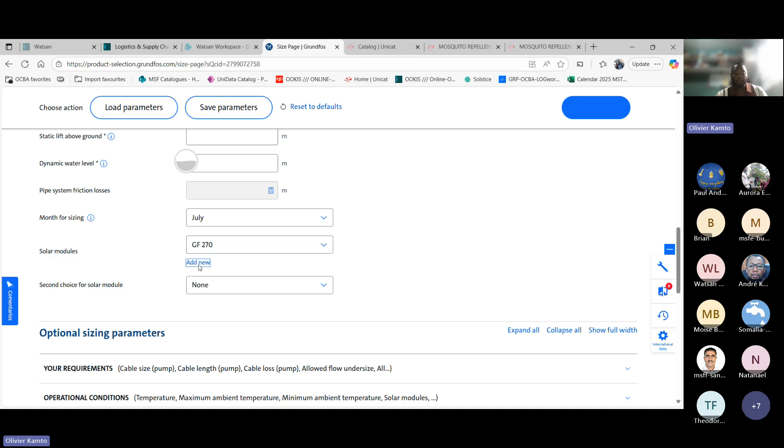So these are things you would have to consider when inputting here. Again, about the solar modules, they have predefined solar modules here, 270, 300, up to 390 watt peak. If you have to input your own, you come to add new, and it will ask you to add all the parameters we talked about earlier: maximum power, maximum voltage, open circuit voltage, maximum current, and short circuit current.

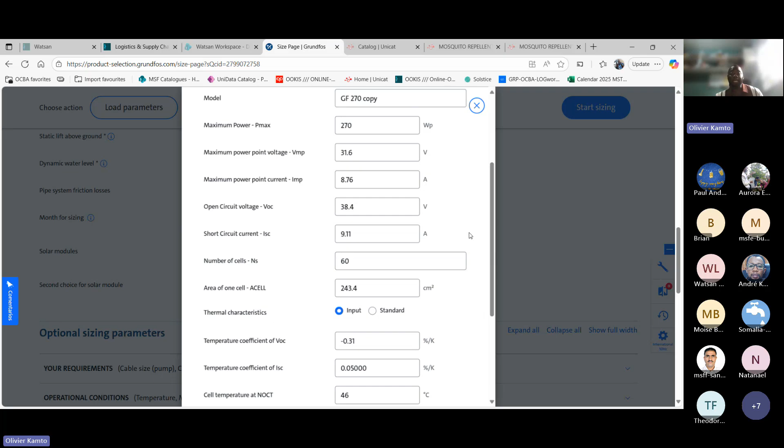If you have other parameters, like the number of cells, the area of one cell, etc., it will further fine-tune the electrical calculations the system will do. But in principle, these first five - power, maximum voltage, maximum current, open circuit voltage, and short circuit current - are the key elements you need.

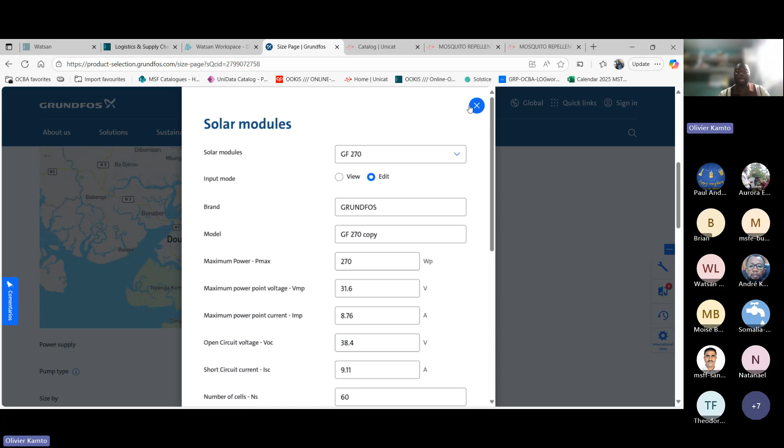For Grundfos, as I said earlier, inputting these parameters is a little challenging. I've not been able to figure out why. I tried asking earlier but didn't get a successful answer. So this is one of the limitations we currently have for Grundfos when inputting solar modules.

Once all of that is done, it comes to us to click on sizing, and it will give us all of the options available. The optional sizing parameters, I will not go for, I will not put them in, and that is it.

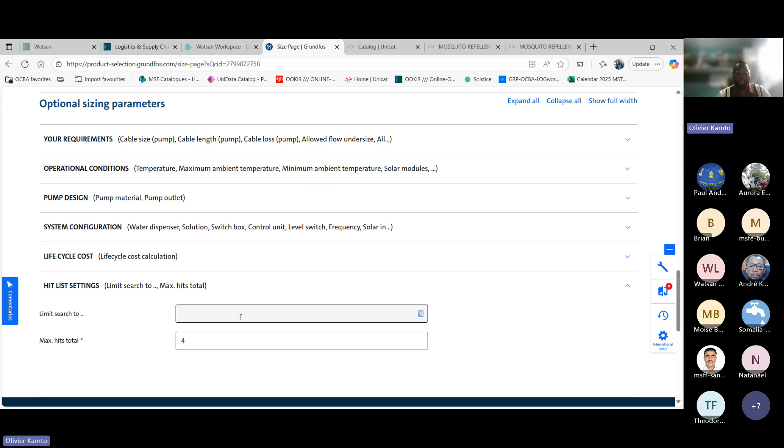Nonetheless, here, if you have a particular brand of pump you want to consider, you can input the brand of pump, and it will calculate only based on this pump. So if you have only an SQF 1.2N, for example, you select this, and when the system runs, it will tell you later whether or not this pump will be okay for your system, because you've given that as a condition it must respect.

But in principle, it's always advisable to leave it open so you will have all the variety, and the system will be able to choose for you the best one based on the properties you have input.

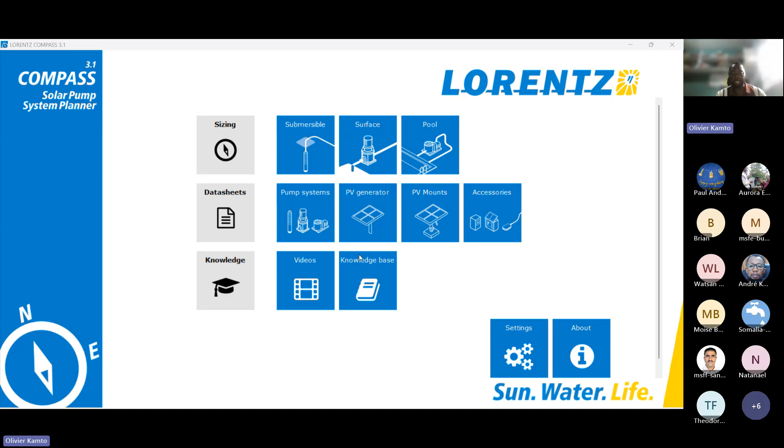You have below here the different data sheets for all their products which they have, right? So of interest, we click on Lorentz, submersible, and then you see it also has an illustrative image, and this is all of the information you need to put. In principle, if we want a particular pump, we can select a particular pump here using custom. If not, we use all pumps that are available.

And then Cameroon, Douala, again, another example. Remember what I said, the tilt angle by default will be assigned based on the angle of your latitude. By default, it will assign it, but you should always make sure that you check this to ensure that you have no issues.

Here also, they ask you a percentage for dirt loss. This is for the solar panels, and if there is dirt on top of the solar panels, it reduces the amount of radiation it gets. So it asks you also for an idea of dirt loss, which can be 5%, 10%, depends on you and where you are.

The motor cable, this will help you to define the area, the length from the pump to the controller, where you plan to put the controller. You see on each of these things, when you click, it shows you exactly, it tries to annotate you on the curve, on the image, so that you should be sure of what you are inputting.

Key point now again is the total dynamic head, which if we have calculated before, we can put here. You see here we have the geometric height, but the pipe is also highlighted, meaning it has also taken into consideration the friction losses here. You get the vertical height from the dynamic water level to the highest point of delivery, plus pressure losses in the pipeline as height of water column. So what we were talking about, that is what is there.

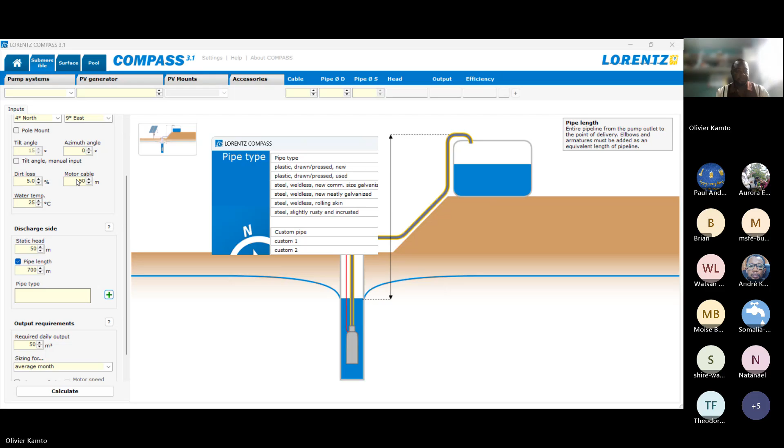Okay, so we do this, and then as I was saying, we select whatever option we want to select here, and this is what it is going to be used to calculate the total dynamic head. Then eventually again, the required daily output. Remember what we said, we are talking of meters cubed per day, and sizing for average month, etc. Here they have the option of limiting the flow rate. So if you want to size it for a particular flow rate, you can put this option and limit it. So that's one of the options.

But then remember about the generator, or the solar panels which we spoke about. Here we have to come and input the generator. So we come to the PV generator tab, which is up here. And you see here, they also have just a couple of panels that they have for their system, and then the rest you can customize it as you want.

So for example, I chose a Remy 450. This is one of the panels that I input by myself. You take the peak, the maximum power for this solar panel, the maximum voltage, etc. You input them here, you just click on them and write the figure, etc. So the more you have, the better.

If you want to use all of these, you will have to select all of them. But if you want to focalize on what you have used, so that you're not calculating based on everything, you just select only what you need, and then there you go.

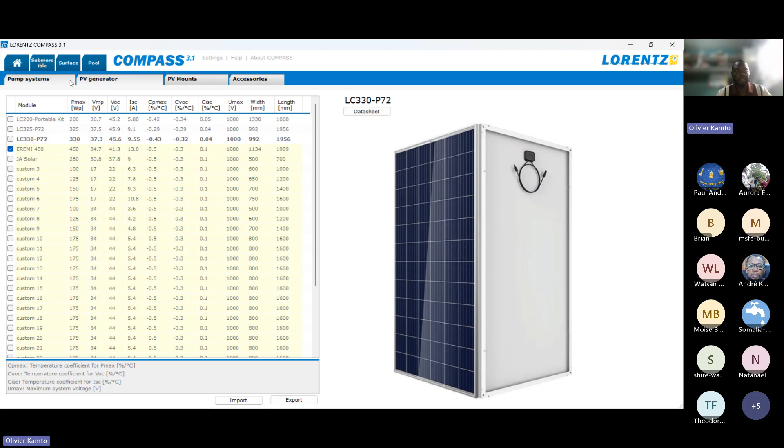PV mount accessories, we will not look into that. The same for the pump system. If you click on the tab pump system, it has all of the pumps that Lorentz has, or at least that my upgrade of the application has. And then it will calculate and choose the best pump within here.

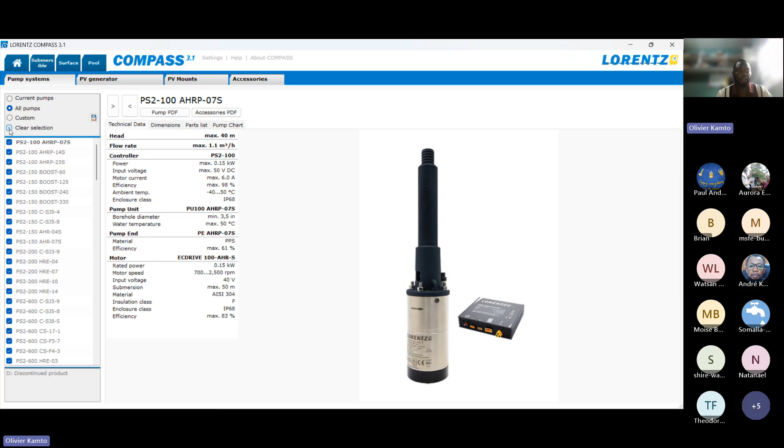But if you want to choose just a particular pump, then you deselect all of them, and then you select just the pump you want to use, and then you can do your calculations.

Once that is done, let's try it. Let's try for the example which we did. We are in Douala, tilt angle, this, etc. The pipe length was 700 meters. The required daily flow, I did not give the daily flow, but in this example let's assume 300 cubic meters per day.

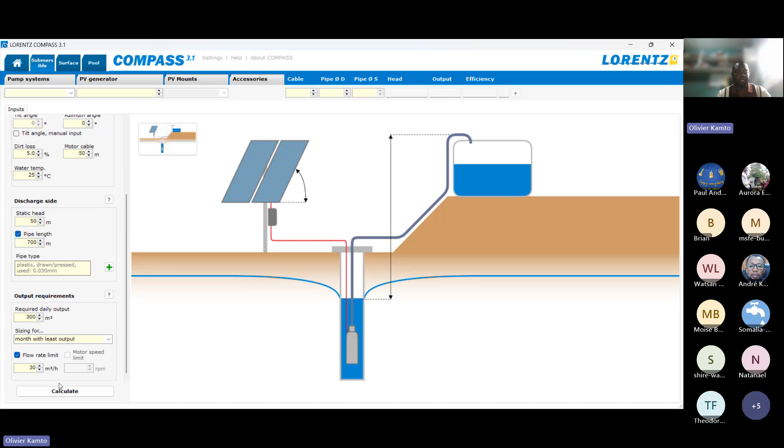And then let us assume sizing for a month with the least solar output. Then I will limit my flow to 30 cubic meters per hour, which is the maximum pumping rate of our borehole. I will limit my flow to that, and then I would click on calculate.

It will spend a couple of seconds, and then it gives me this solution here, with the pump size, etc. You'd see it gives me the pump mark, model, the brand, etc. It gives me 19 times 3 solar panels.

The same for Grundfos will show you the same. It gives me 19 times 3, so 19 solar panels in series, and then three chains of 19 panels. So a total of 19 times 3 panels, which you will need 19 in series, 3 chains in parallel. And then here you see the size of the cable.

Here we have 4 millimeter square cable, a 100 millimeter pipe. The 100, this is the internal diameter. Pay attention, so it gives you that you need this diameter of pipe to go. And then it gives you all of the characteristics here.

So for the month with the least solar output, this pump will be able to provide you 229 cubic meters per day, which is slightly lower than what we need, right?

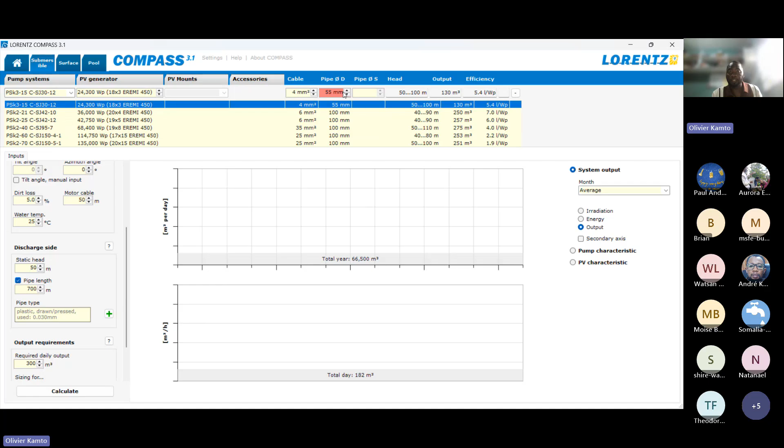And the more you reduce, you see it goes to red. Red means the system will not even work at all. So these are things I just wanted to show you so that you should pay attention with, and then you can modify them. Similar thing for current and stuff.

Voila. This has been a little bit fast, but I think you have seen and you have the principle. So this I would keep quiet here, and sorry for wasting your time.

Olivier, it wasn't a waste of time. It was very interesting, and I'm sure people really enjoyed it. But it's a lot of things to do. I think the way we leave it is, they've got the links, they know how to do it, they've been through it. So I advise them to go and play with it, put some numbers in and see how you feel. And then you'll learn very quickly the things Olivier was showing you on how changing this will affect the choice of pump and things like this.